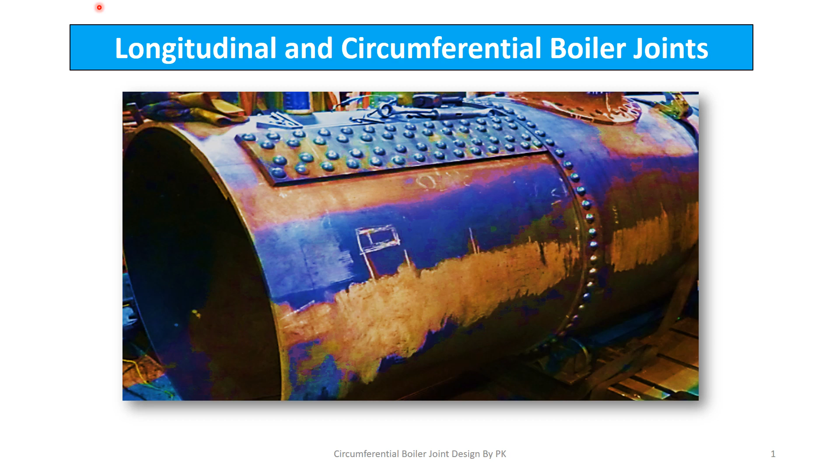The first step is to find out the boiler shell thickness, T. In this figure a boiler shell is shown to you, and the inside diameter of this boiler shell is ds, or sometimes it is denoted by the symbol di. This boiler shell stores steam at pressure P. Sometimes this symbol is called Pi. When this high pressure steam is stored inside the boiler shell, because of this steam pressure there are chances that the boiler shell will burst into two halves. So this is the upper half and this is the lower half.

And this area which is shown by the shaded lines will offer some resistance to this type of failure. When this area offers resistance, some stresses develop across this cross section, and this stress is denoted by the symbol sigma t, normally called hoop stress. The thickness of the boiler shell is T and the length of this boiler shell is L. This is the left side area and this is the right side area. Both areas will offer some resistance.

So we have to equate the force exerted by the steam pressure P with the resistance offered by the material. So P into ds into L: P is the pressure, and ds into L is the projected area, because ds is the diameter and L is the length. So this is the force exerted by the steam pressure, and that should be equal to sigma t into 2TL. Sigma t is the hoop stress, and the area is 2TL, because TL is the area on the left side and TL is the area on the right side. So this is twice TL.

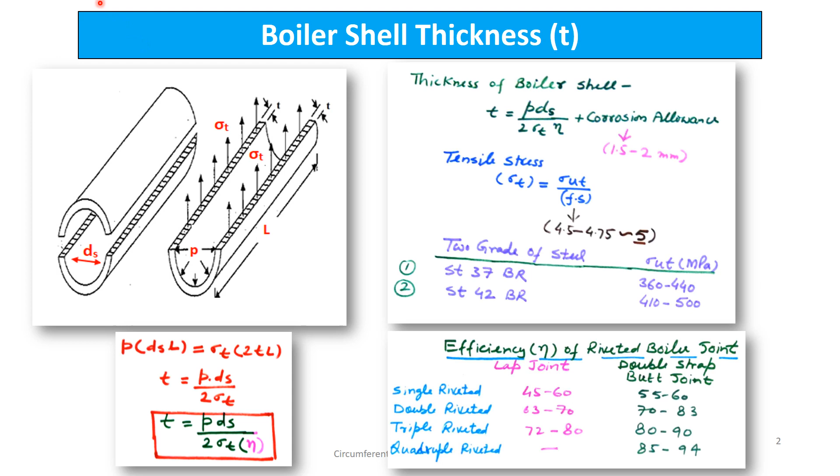The next is to find out the diameter of the rivet and the diameter of the hole. The diameter of the rivet we normally call dr, and this can be found with the help of the Unwin formula. First, if the thickness is more than 8 mm, the diameter of the rivet should be equal to 6 under root t, where t is the thickness in mm. So the dr we get from this formula is also in mm.

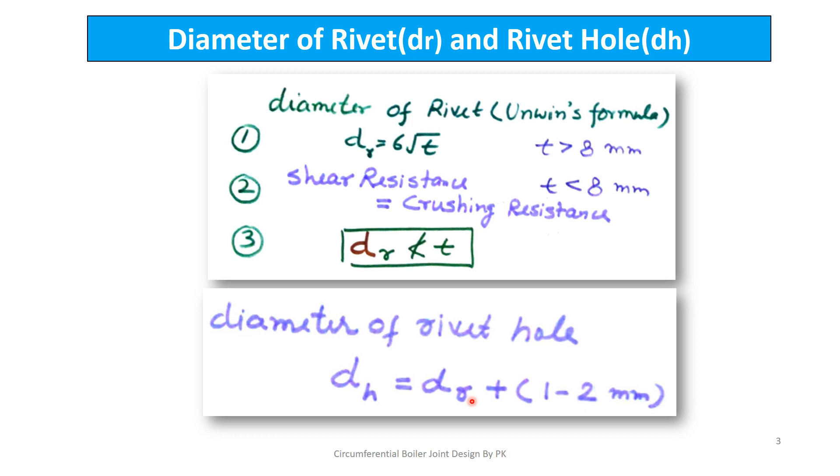If the thickness is less than 8 mm, we equate the shearing resistance of the rivet with the crushing resistance, and by equating these two we find out the diameter of the rivet. Third, in no case should the diameter of the rivet be less than the thickness of the plate. Next, the diameter of the rivet hole is always more than the diameter of the rivet. So we add 1 to 2 mm to the diameter of the rivet to get the diameter of the hole using this formula.

Now let us understand the construction of the circumferential lap joint with the help of these two figures. This upper figure shows the cross section of the circumferential lap joint along the length direction, and here we see that these two plates are overlapped. This green plate is covered with the help of this blue plate. With the circumferential joint, we can join these two plates together. So there should be an overlap. That means one plate overlaps over the other, and the amount of overlap is given as AOL.

Now the distance between two consecutive rows of rivets we normally call the transverse pitch. This is called PT here, and this is the margin. Margin is defined as the distance from the center of the rivet to the nearest edge. This is the upper row of rivets, and the distance to the nearest edge is called M. Similarly, for the lower row of rivets, the distance to the nearest edge is called M. The value of the margin is normally kept as 1.5 dr to avoid tearing failure of the plates, where dr is the diameter of the rivet.

If you see the top view of this rivet arrangement, all the rivets are arranged in the circumferential direction, and the distance between two consecutive rivets along the circumferential direction we call the pitch, denoted by the symbol P1. Now, because we store steam at pressure Pi inside this pressure vessel whose inside diameter is ds or di, the pressure on the area of this cover plate applies a force on the joint equal to area into pressure. So pi by 4 di square into Pi is the force acting on the joint.

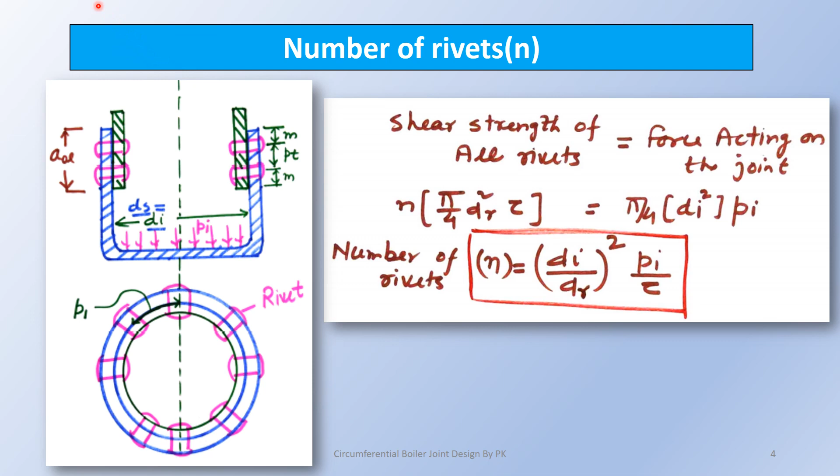Now next we see how to find out the pitch of the rivet, which is normally denoted by the symbol P1. We saw in the previous slide that all the rivets are arranged in the circumferential direction, and the distance between two consecutive rivets is normally called the pitch. We know the efficiency of the circumferential lap joint, eta L, should be equal to the least of PT, PS, PC divided by P solid into 100, where PT is the tensile strength per pitch length, PS is the shearing strength per pitch length, and PC is the crushing strength per pitch length.

Normally it is observed that out of these three values, the PT value is the minimum one. So here we put the value of PT and the value of the tensile strength of the solid plate, that is P solid, into 100. The PT value is (P1 minus dr) into T into sigma T, divided by P solid, the tensile strength of the solid plate. For that we put dr equal to 0, so the tensile strength of the solid plate per pitch is P1 into T into sigma T. When we solve this expression, we get the efficiency of the circumferential lap joint equal to P1 minus dr divided by P1.

So we put the value of circumferential lap joint efficiency here. It is 62% for intermediate joints, and for the end joints its value is 50% or 42%, whichever is minimum. The intermediate joint is normally used when we want to increase the length of the pressure vessel. We join one pressure vessel with the other pressure vessel, and we call that joint the intermediate joint. And when we have to cover the end of the pressure vessel with the end cover plate, we take the efficiency as 50% or 42%, whichever is minimum. So we put the value of eta L and the value of dr here, and from this equation we find the value of P1.

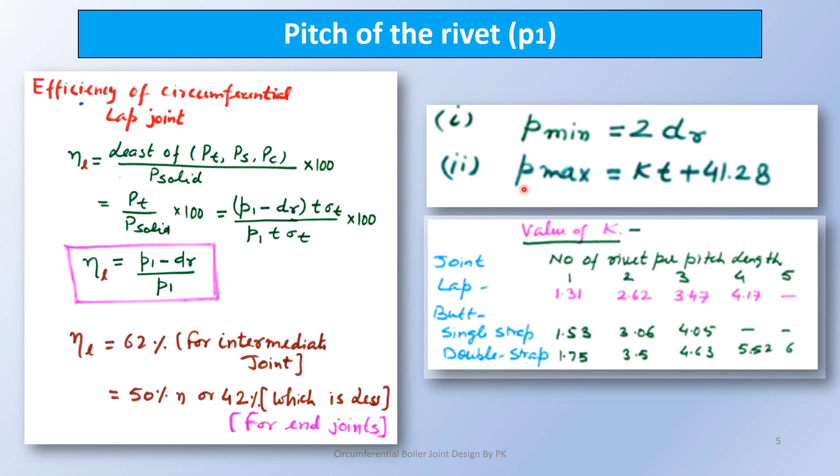So this P1 value should lie between P minimum and P maximum. If P1 is less than P minimum, then we assume the pitch as P minimum, and if P1 is more than P maximum, then we assume P maximum as the pitch of the rivet.

After finding out the total number of rivets, now we have to find out the number of rivets in one row, denoted by the symbol NOR. We take the circumference and divide by the pitch. Let us understand with the help of this figure. The inside diameter is di, with half the thickness on each side, so the diameter of the middle circle is di plus t, and the complete circumference is pi into (di plus t). We divide this by the pitch, the distance between two consecutive rivets along the circumferential direction. So pi (di plus t) divided by P1 gives the number of rivets in one row.

Now next we have to decide the number of rows. The number of rows is found with this formula: NR equals the total number of rivets N divided by the number of rivets in one row, so NR equals N divided by NOR. Depending upon the number of rivets, we decide whether to use a single riveted lap joint or a double riveted lap joint.

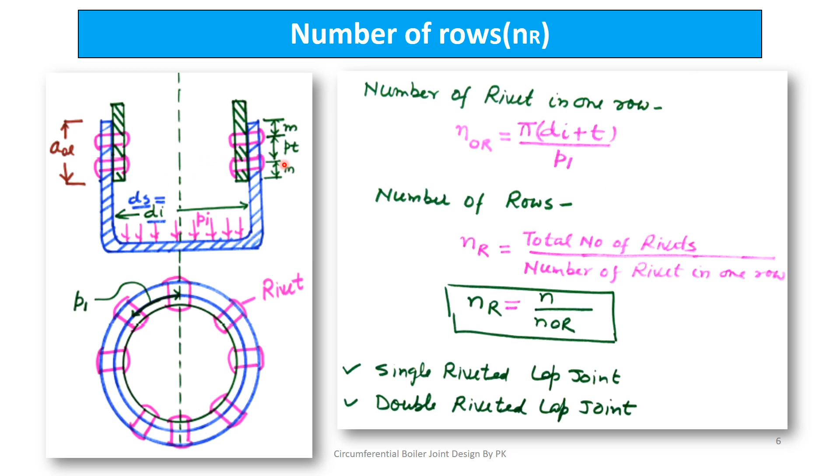Okay, so if there are two rows, the arrangement is of this type basically, and we have to find out the transverse pitch in this case. And if there is a single riveted lap joint, if the number of rows is one only, then the transverse pitch value should be equal to 0.

So next we have to find the value of the transverse pitch PT, the overlap AOL, and the margin M. The transverse pitch, as we have already defined, is the distance between two consecutive rows of rivets. This is one row of rivets, this is the second row, and the distance between them is called PT. If it is a single riveted lap joint, then this PT value is 0. When there are a number of rows, then we have to find this value of PT.

This margin is M, which normally is 1.5 dr on both sides. And for the overlap, when we have a lap joint, one plate overlaps the other. So we have to find this value of overlap, that is AOL, the distance from this point to this point. So first of all, we see how to find the value of the transverse pitch PT when the number of rivets in each row is equal.

This is the first row, this is the second row, and we assume the number of rivets as equal. For zigzag riveting, PT should be equal to 0.33 P1 plus 0.67 dr, where P1 is this pitch, normally called the circumferential pitch, and dr is the diameter of the rivet. For chain riveting, when the two rows of rivets are identical, PT should be equal to 2 dr, where dr is the diameter of the rivet.

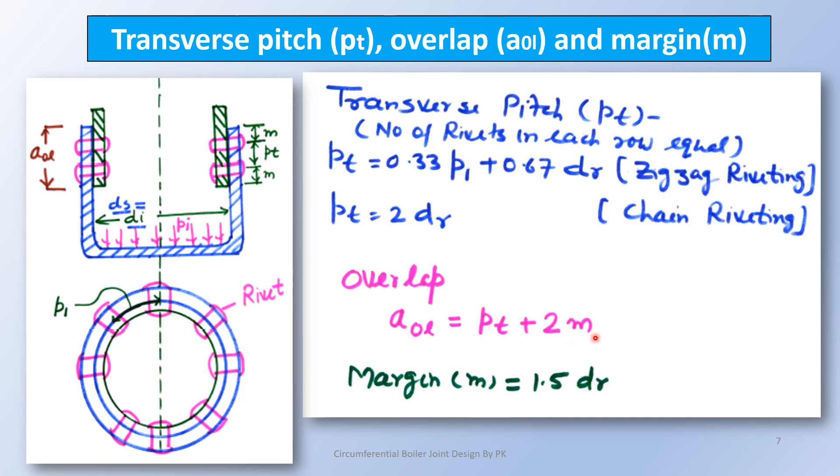The amount of overlap we find with this formula: AOL equals PT plus 2M. For a single riveted lap joint, PT is 0, because there is only one row of rivets. So AOL in the case of a single riveted lap joint will be equal to 2M. We put the value of M, the margin, equal to 1.5 dr.

Now we have to understand the whole procedure with the help of an example. We have to design a circumferential lap joint. The data given is DS equal to DI equal to 0.8 meter, the inside diameter of the boiler shell. Both symbols are the same here. The steam stored inside this vessel is at pressure 2 megapascal. The efficiency of the longitudinal joint is 80%, and of the circumferential joint is 62%. The tensile stress is 80 megapascal, shear stress is 60 megapascal, and crushing stress is 120 megapascal for the rivet material.

So as per the design procedure, first we find the shell thickness. The shell thickness t equals P ds divided by 2 sigma T into efficiency, plus corrosion allowance. We put P equal to 2 megapascal. ds or di is the same, 0.8 meter, so we put 0.8 and multiply by 1000 to convert into mm.

Then divide by 2 into sigma T. Sigma T is 80 here. The efficiency of the longitudinal joint is 80%, so this is 0.8. We add a corrosion allowance of 2 in this expression. We get 12.5 plus 2, which is 14.5. We approximate this value to 15 mm.

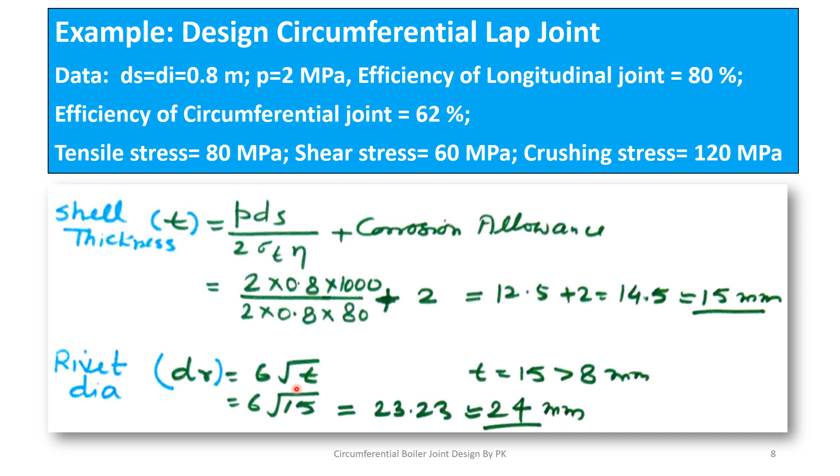Once we know the thickness, we have to find the rivet diameter. The thickness is more than 8 mm, so we use Unwin's formula to find the diameter of the rivet: dr equals 6 root t. We put t as 15 and get 23.23 mm, which we round off to 24 mm. So the shell thickness is 15 mm and the rivet diameter is 24 mm.

After finding the shell thickness and rivet diameter, we find the number of rivets, equal to (di or ds divided by dr) whole square into pi divided by tau. The inside diameter of the shell is 0.8 meter, that is 0.8 into 1000, divided by dr, which is 24, whole square.

This value of pressure is 2 and the value of the shear stress is 60 megapascal. So this value comes out to be 37.03. We can round off this value to 38. So these are the total number of rivets which are used to make a circumferential joint for this problem.

Now we have to find out the pitch of the rivet. The pitch of the rivet can be found from the condition that the efficiency of the circumferential joint should be equal to P1 minus dr divided by P1. We put all these values here because the circumferential efficiency is given as 62%. So we put here 0.62. We have to find the value of P1, and the dr value is 24 here. We solve this expression and find the value of P1. The P1 value comes out to be 24 divided by 0.38, that is 63.15 mm.

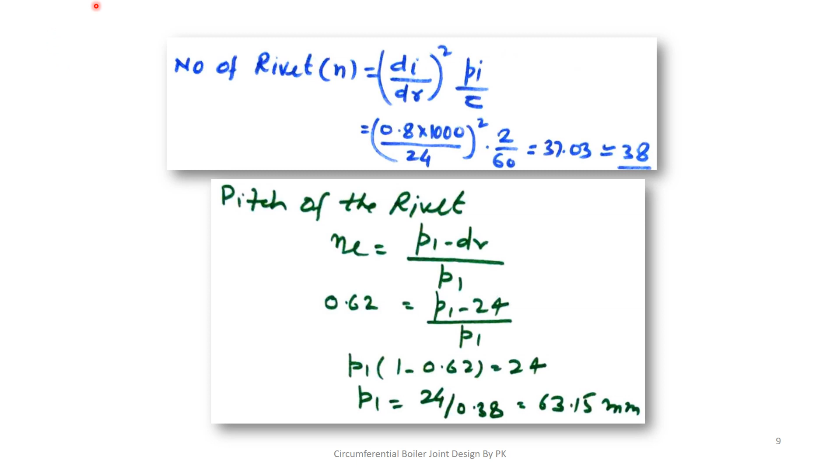So by using the formula, we have seen how to find out the total number of rivets and how to find out the pitch of the rivet. After finding the pitch using the formula in the previous slide, now we have to compare this value with P minimum and P maximum. The value of P1 should lie between P minimum and P maximum. The value of P minimum is 2 into dr, that is 2 into 24, which is 48 mm.

And the value of P maximum is K into T plus 41.28. The value of K is 1.31 because there should be only one rivet per pitch length, and this is for a lap joint. From the table we have seen this value. We put the value of T as 15 and add 41.28. This comes out to be 60.93. So we have seen that the P1 value is more than the P maximum value.

So our pitch for this rivet system is the maximum value of the pitch, that is P maximum, 60.93. We round off this value to the nearest lower number, that is 60, because a higher value is not permitted since this is the maximum value of the pitch. So we take the lower value, 60 mm. So the pitch of the given system is 60 mm.

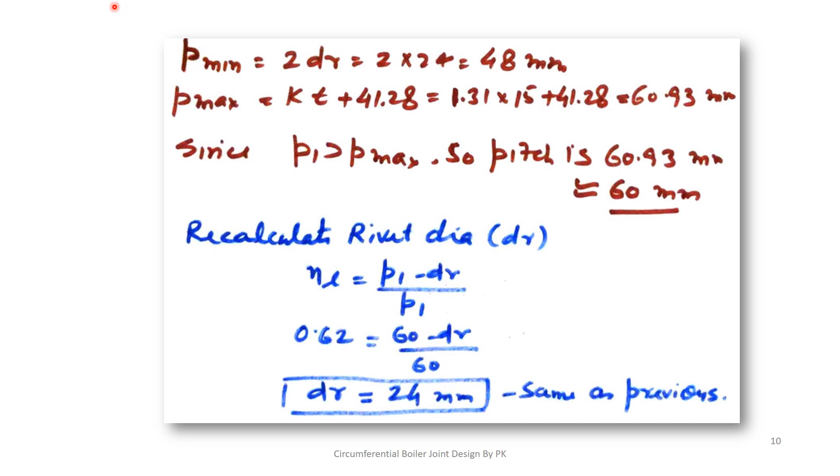Now after finding out the pitch, we have to recalculate the diameter of the rivet using the same formula, that is the efficiency of the circumferential joint should be equal to P1 minus dr divided by P1. The efficiency is 62% here, so we put 0.62. We put the P1 value as 60 minus dr. When we solve this, dr comes out to be 24, same as the previous value. So this way we can redesign the diameter of the rivet. In this case it comes out to be the same.

Now once we find the diameter of the rivet and the pitch of the rivet, the next step is to find the number of rivets in one row using this formula: n1 should be equal to pi into di (or ds, same here) plus t, divided by P1. We put all the values here. The value of di or ds is 800 mm, plus 15 mm is the thickness, divided by 60, so we get the value of 42.

Here we see that the number of rivets in one row is more than the total number of rivets, so we assume that the number of rivets in one row is 42. When the number of rivets in one row is 42 and the total number of rivets is 42, there is only one row of rivets, and for one row of rivets we use a single riveted lap joint. When we use a single riveted lap joint, the transverse pitch should be equal to 0.

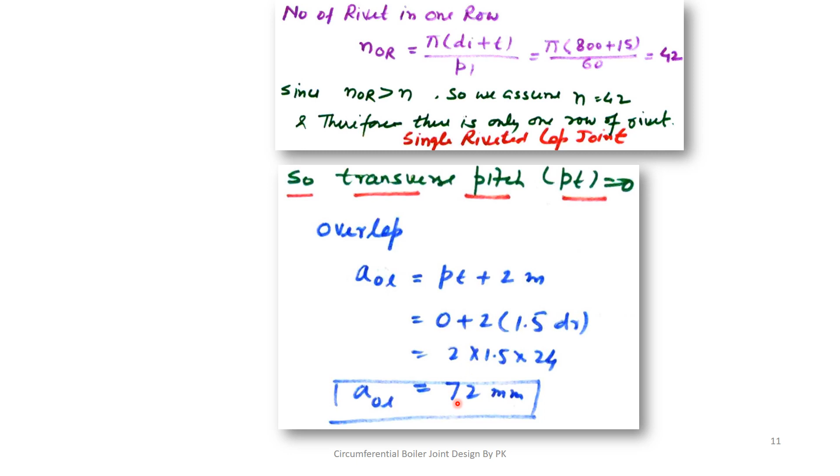Next we have to find the overlap. The overlap is equal to Pt plus twice m. The value of Pt is 0 because we use a single riveted lap joint; there is one row of rivets along the circumferential direction. For 2 into m, m is the margin, that is 1.5 into dr. So this is 0 plus 2 into 1.5 dr. The value of dr is 24, so 2 into 1.5 into 24 comes out to be 36 into 2, that is 72. So the value of the overlap here is 72 mm.

Thanks for watching this video on circumferential boiler joint design, where we saw the step-by-step procedure for designing the circumferential boiler joint along with an example. So the complete methodology is very well understood with the help of the example.